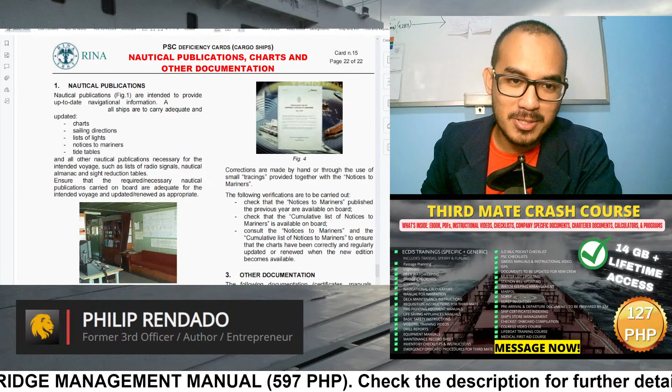For our English speaking viewers, I will do my very best to communicate in English in this live stream. I want to discuss the publications that need to be updated on board.

Plenty of seafarers don't understand this until they go on board. They don't understand that before you conduct your duty, you must be capable of understanding what publications are needed to be checked on board the ship.

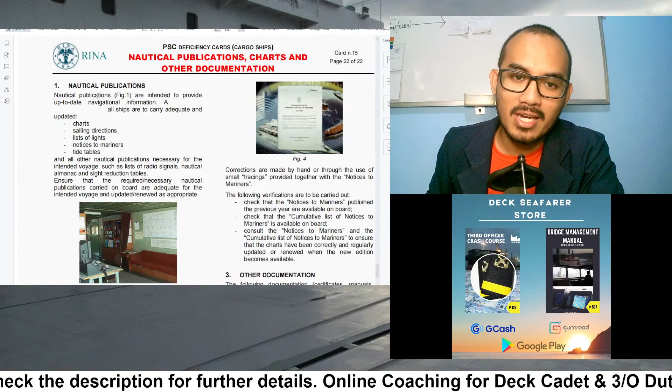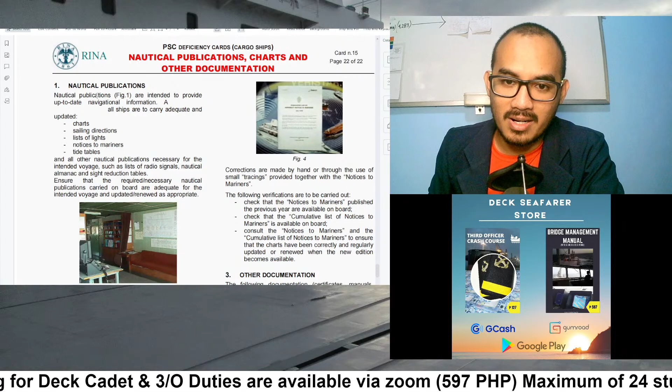If we read the statements right now, this is the file I got from my previous classification on board the ship. RINA is one of the many classifications of ship. In other vessels you'd have ABS, American Bureau of Shipping. In my case it was RINA and ABS. I got a copy of their card, PSC or Port State Control deficiency cards from cargo ships.

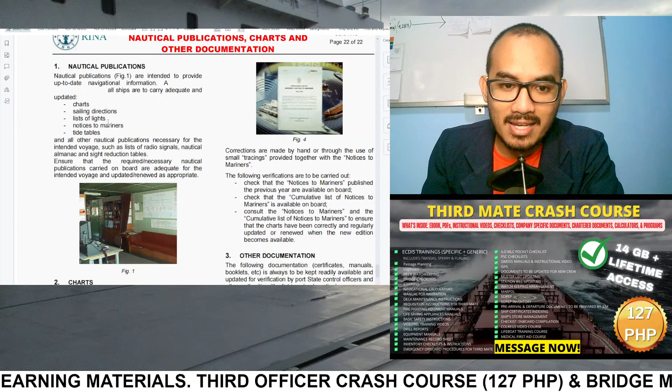Nautical publications, charts, and other documentation. Nautical publications are intended to provide up-to-date navigational information. All ships are to carry adequate and updated charts, sailing directions, list of lights, and notices to mariners.

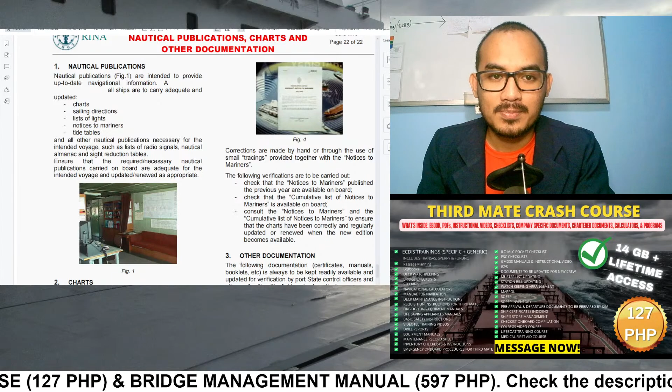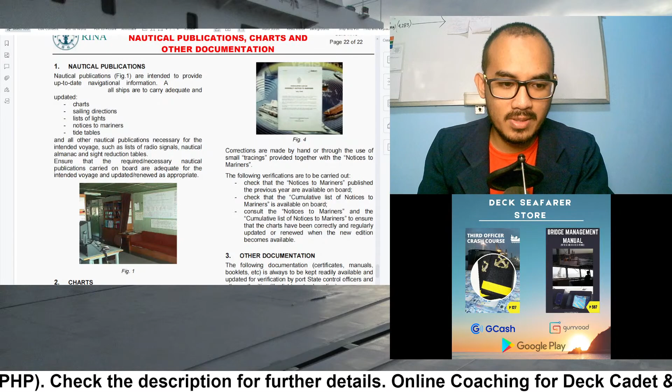Let me just give you a copy of it. Wait, where are the links? Let me change the window capture. Wait, properties, window capture. Admiralty, there we go, okay.

What is Admiralty sailing directions? This is the definition: it provides essential information to support port entry and coastal navigation for all classes of ships at sea, split across 75 volumes, because each one covers a different area. Coverage includes the world's main commercial shipping routes and ports. Each volume offers information on what you see in sailing directions.

Navigational hazards, buoyage, pilotage regulations, local regulations, general notes on countries, port facilities, seasonal currents, ice, and climatic conditions. This information, when used alongside official Admiralty charts, including ENC charts, can help increase situational awareness on the bridge.

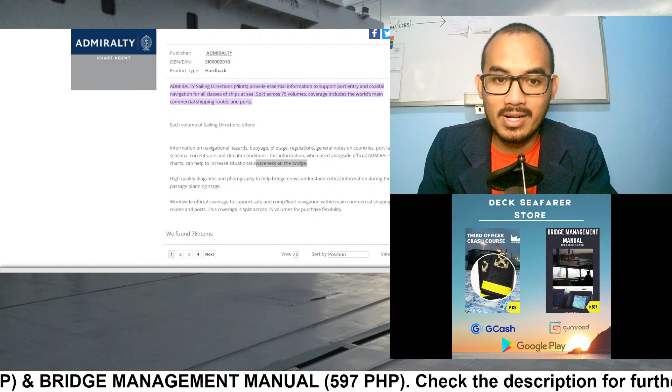Now, plenty of deck cadets, when they graduate from school after finishing their 3 years, don't know what Admiralty sailing directions is. They are not familiar with this publication. They were taught how to plot a course on nautical charts, but not familiar with Admiralty publications. This is quite nerve-wracking for somebody about to be an officer. If you are not familiar with Admiralty digital publications, you won't be capable of updating it long term.

It also says you need to update Admiralty digital list of lights. What is Admiralty digital list of lights? It is an advanced source of navigational lights and fog signal information with coverage of more than 85,000 individual fixed light structures. ADLL also contains a number of lit floating marks, including pontoon lights.

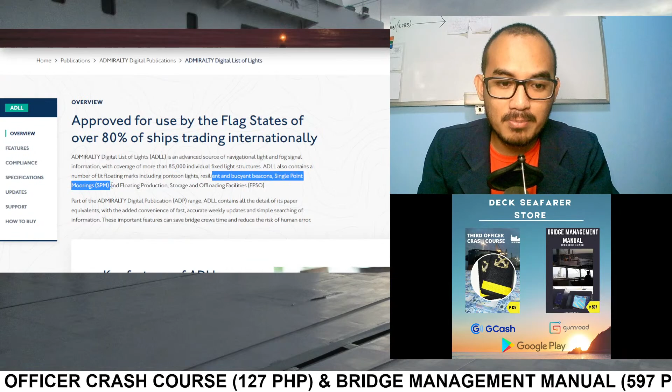If you have studied the IALA Buoyage System Region A and Region B, this is the publication for you: resilient and buoyant beacons, single point moorings, and floating production, storage, and offloading facilities. Part of the Admiralty digital publications range, ADLL contains all the detail of its paper equivalents with the added convenience of fast, accurate weekly updates and simple searching of information. Basically, this is the digitalized version of the paper one.

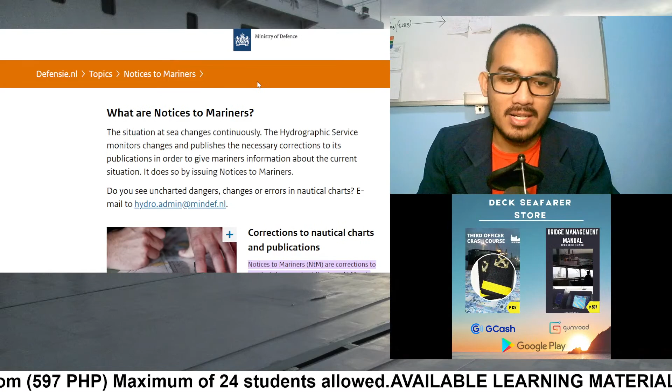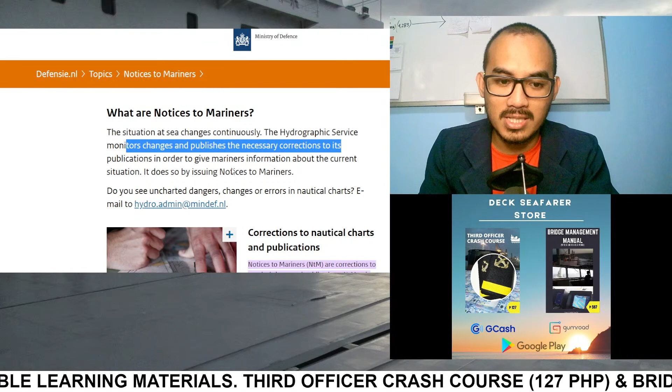Now, what is Admiralty notices to mariners? Quick review: the situation at sea changes continuously. The Hydrographic Service monitors changes and publishes the necessary corrections to its publications in order to give mariners information about the current situation. It does so by issuing notices to mariners.

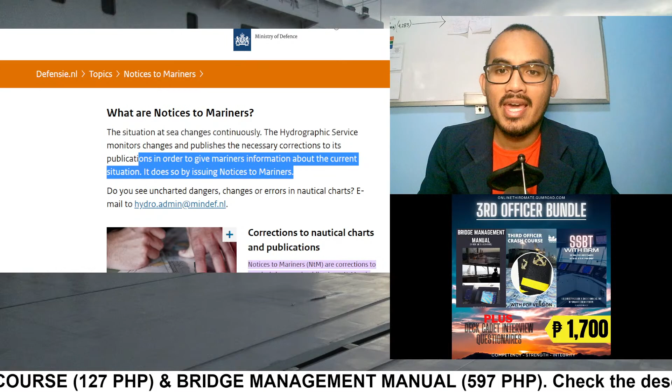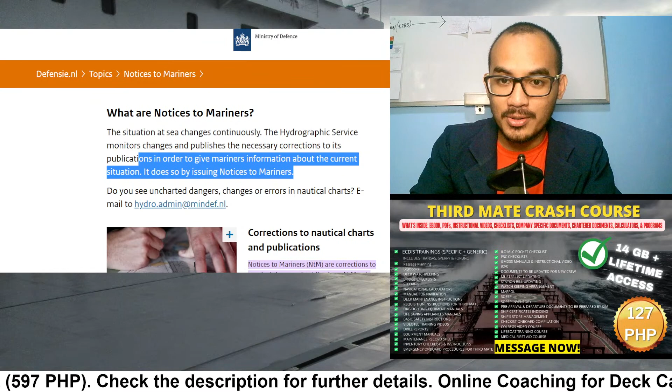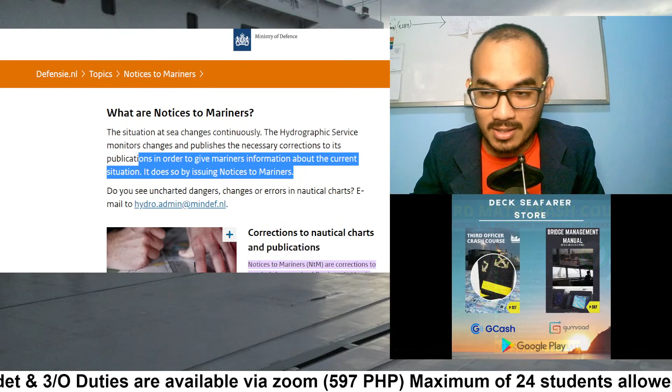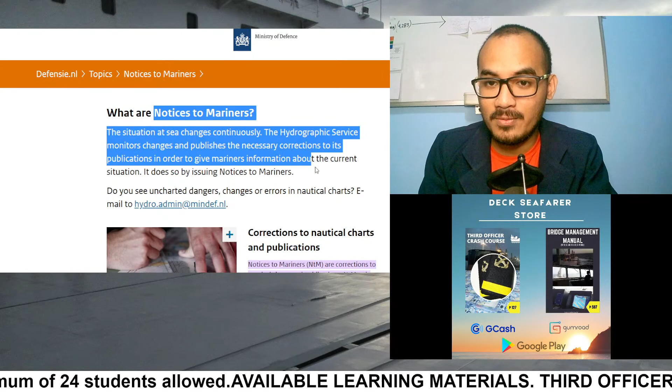For example, in your passage plan you see a clear route. Now all of a sudden you receive data that, in this location, an offshore platform was relocated or built. So you see that in your notices to mariners, and you could update your chart - there will be a course alteration, a change of waypoint. You would inform the company, you would inform your charterer because you received a notice to mariners. In some cases you'll have to plot it in your nautical chart or in ENC, electronic navigational charts.

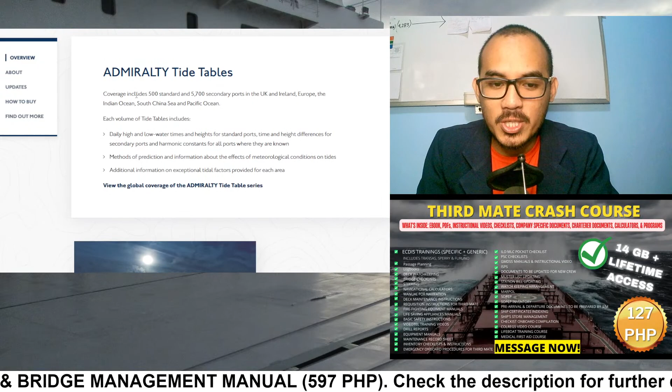Last but not least is: what is Admiralty tide tables? Well, it's very simple. Admiralty tide tables coverage includes 500 standard and 5,700 secondary ports in the UK.

Admiralty tide tables are easy to use, containing tidal times and heights, including tidal stream information to support the planning of departure and arrival times. This is very important, especially for chief officers.

Way back in the day, I used to compute cargo handling, the loading and distribution plan with my chief officer. We always took note of the tides - are we in low tide or high tide? How do we handle the mid drafts? How do we compute for low tide and high tide? I will discuss this further in upcoming videos with regards to trim and stability.

Admiralty tide tables contain easy to use tidal times and heights, including tidal stream information. If you're going to be a duty officer, duty rating, or duty cadet at the gangway, we always put a copy of the Admiralty tide tables at that specific date, at that specific day, in our gangway.

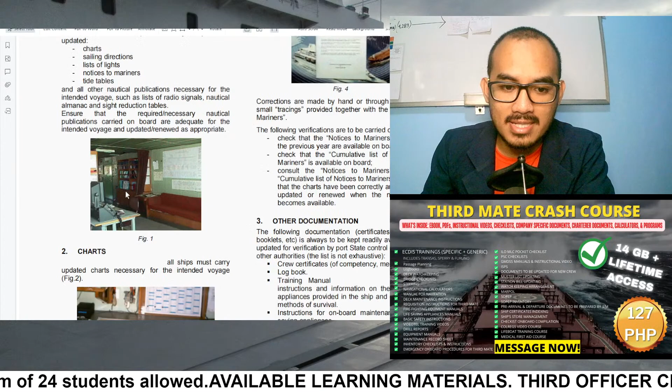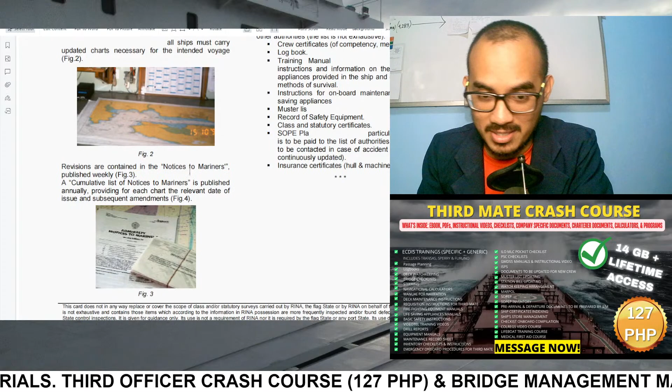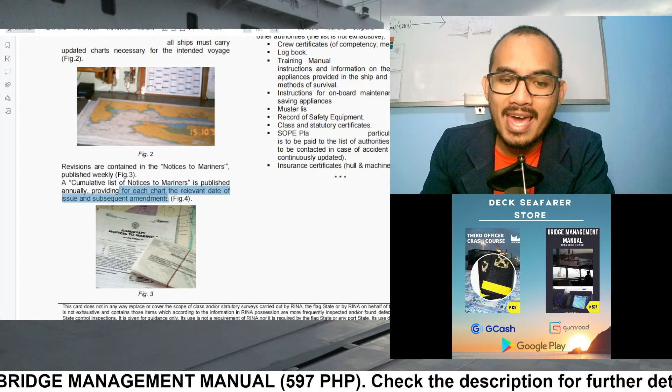Next, you also have to update the charts. All ships must carry updated charts necessary for the intended voyage. Revisions are contained in the Notices to Mariners, the one I mentioned earlier, published weekly. A cumulative list of notices to mariners is published annually, providing for each chart the relevant date of issue and subsequent amendments. You could also receive daily notices to mariners if applicable to your situation.

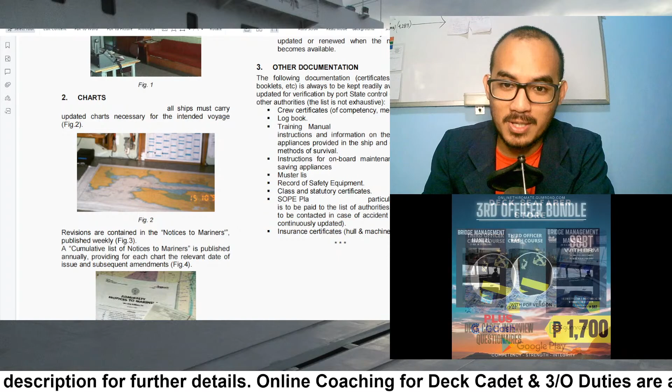There are plenty of notices to mariners that you might receive, but not every NTM is applicable to your location, your ship, or your condition. Just take note of that. But if it is applicable, you must update everything inside the bridge.

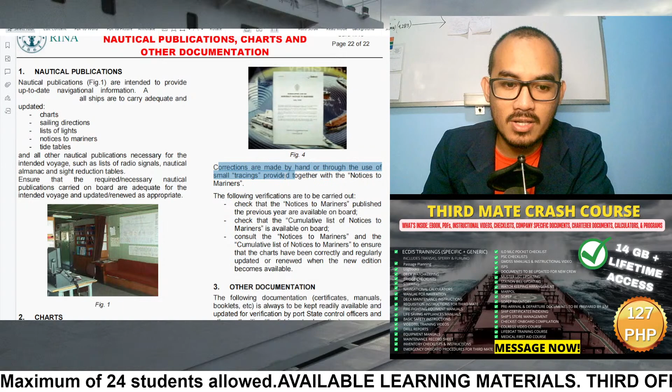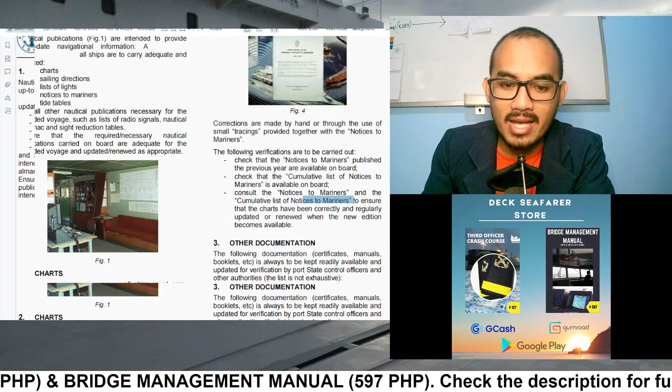Corrections are made by hand or through the use of small tracings, provided together with the notices to mariners. The following verifications are to be carried out: check that the NTMs published the previous year are available on board, check that the cumulative list of notices to mariners is available on board, and consult the NTMs and the cumulative list to ensure that the charts have been correctly and regularly updated or renewed when the new edition becomes available.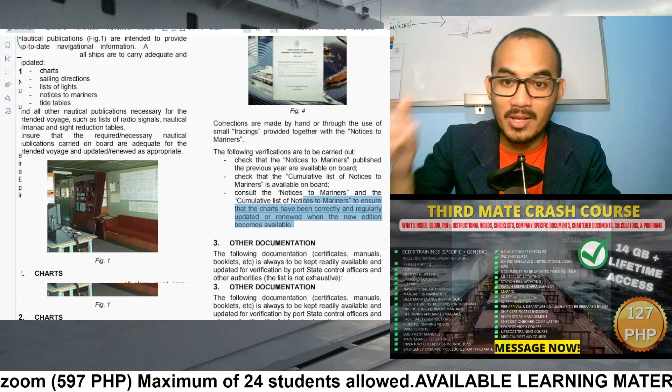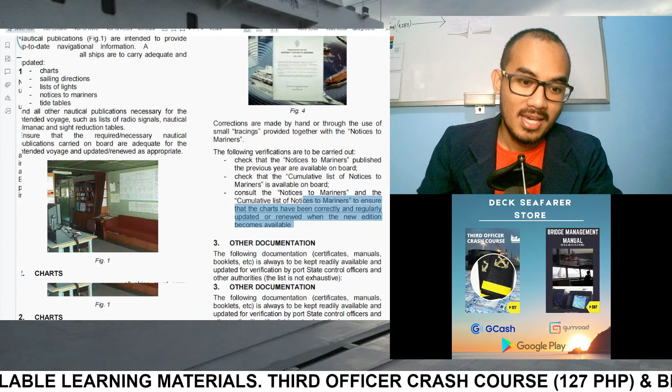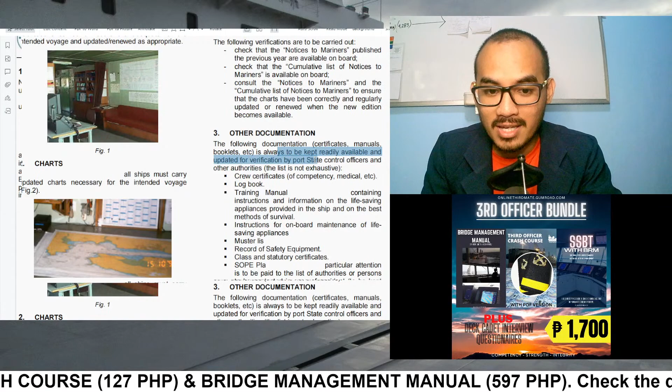Next, other documentation. The following documentation, certificates, manuals, and booklets are always to be kept readily available and updated for verification by port state control officers and other authorities. The list is not exhaustive.

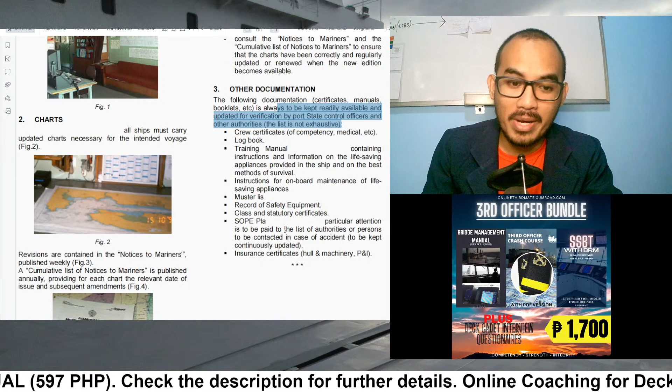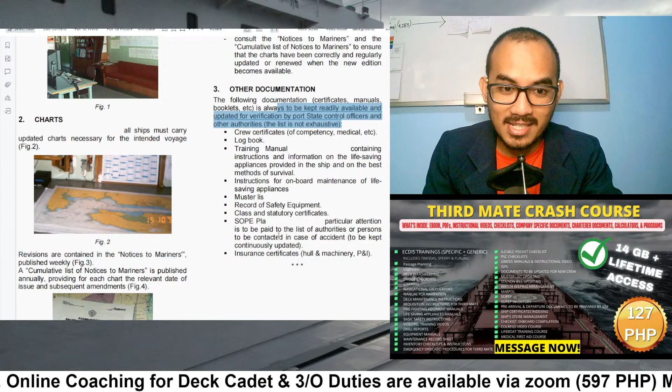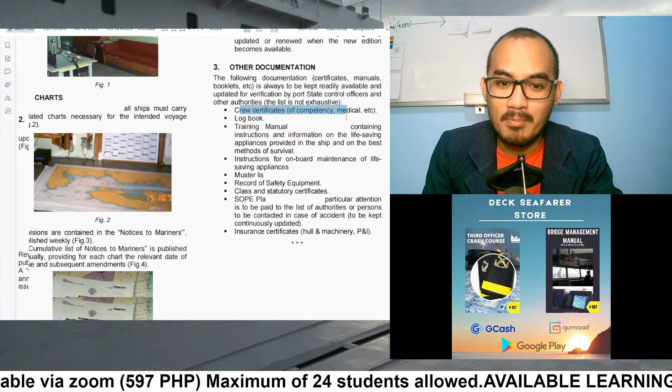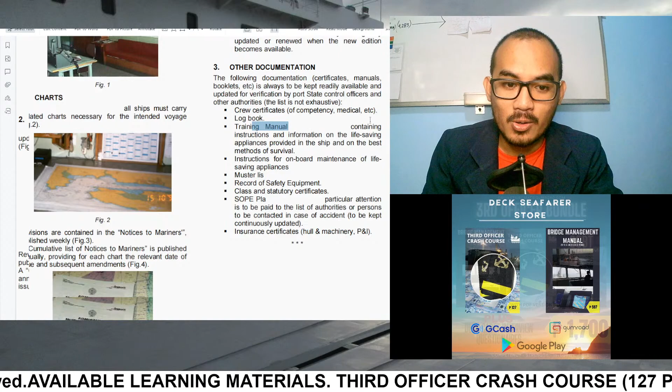Hindi lang nalagay dito sa Port State Control Deficiency Card, pero pwede itong madagdagan. Ano ba yung mga dapat updated sa barko? Yung mga crew certificates, yung competency nila, yung medical, etc. Pati yung passport, minsan check din niya, seaman's book, expired na ba? Next is logbook. Next is training manual containing yung instructions and information on the life-saving appliances.

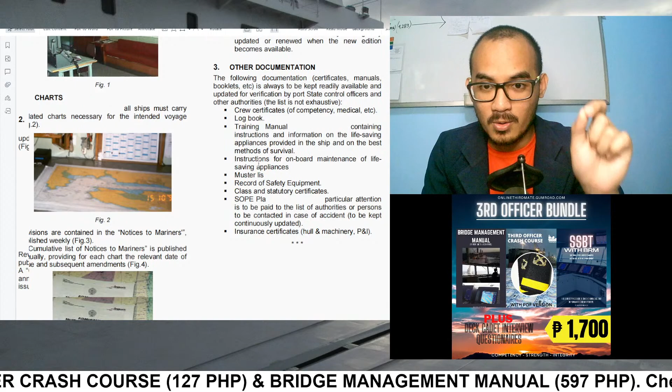Sa'yo ito as a tresero opisyal, provided in the ship and on the best methods of survival. Updated siya, may mga pirma ng crew, may lista ng crew. Instructions for onboard maintenance of life-saving appliances. Magkadikit yan dito sa training manual usually.

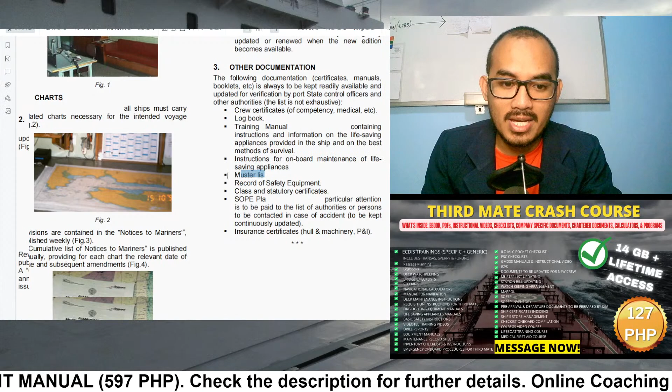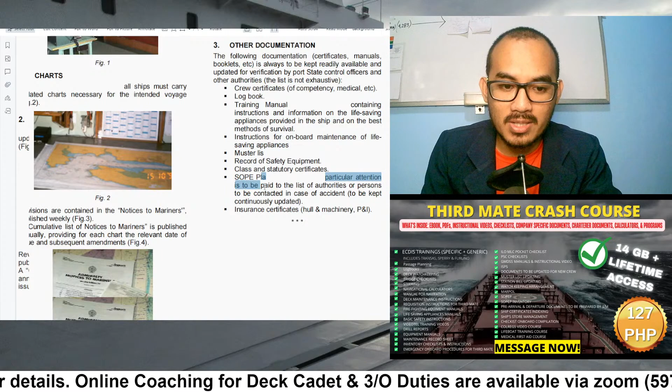Muster list, okay? Record of safety equipment, meron din. Class and statutory certificates, okay? Kasama mo dito si Kapitan. SOPEP plans, particular attention is to be paid to the list of authorities or persons to be contacted in case of accident, to be kept continuously updated.

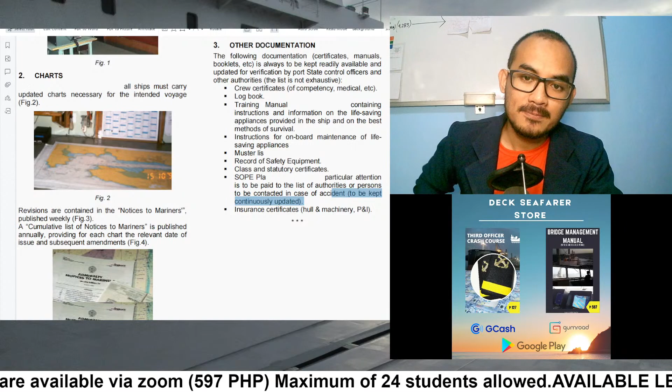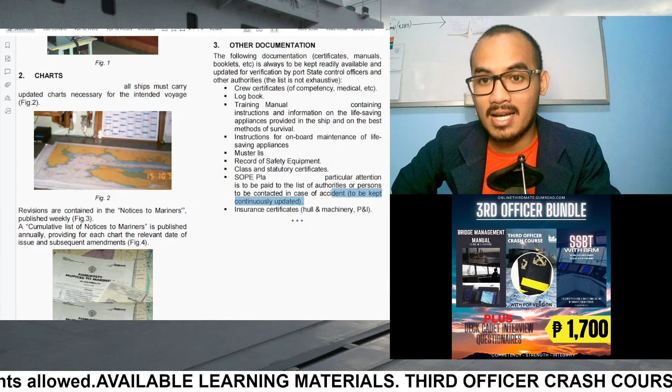I have made a video about this with regards sa pag-update ng emergency contact list. Hanapin niyo po yan sa akin channel, meron po akong video. If I remember, G-001 ba yun? Yung content, depende po yun sa inyong company. Yun yung kanyang certificate, yun yung form number. Depende po yan sa amin noon, if I remember, G-001 eh. Pero tignan ko ulit mamaya.

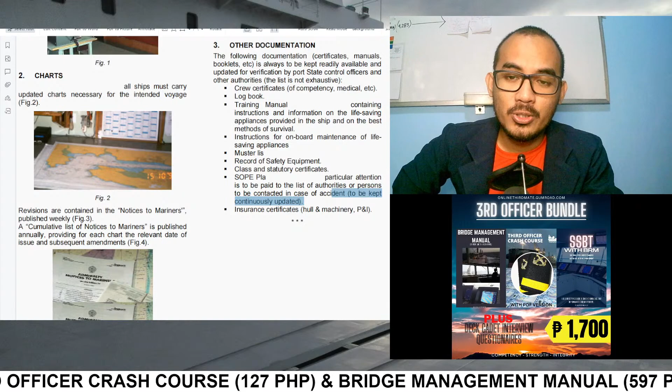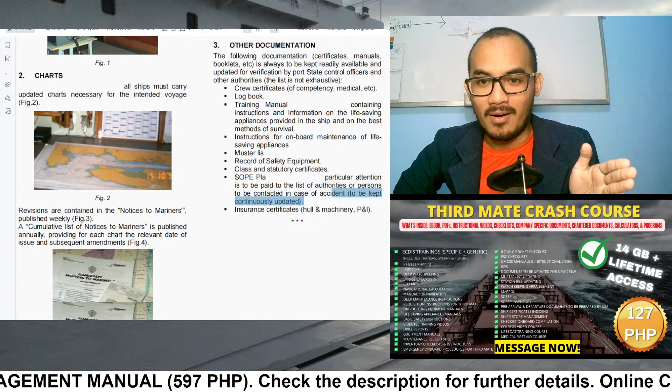Yung emergency contact sheet na yon, ina-update po yon kada palit ng puerto. Kung napunta ka sa Africa, tapos next port mo Africa pa rin, same pa rin yung mga contact details halos doon. Pero pag nanggaling ka sa Africa, napunta ka sa India, papalitan mo doon yung emergency contact sheet mo.

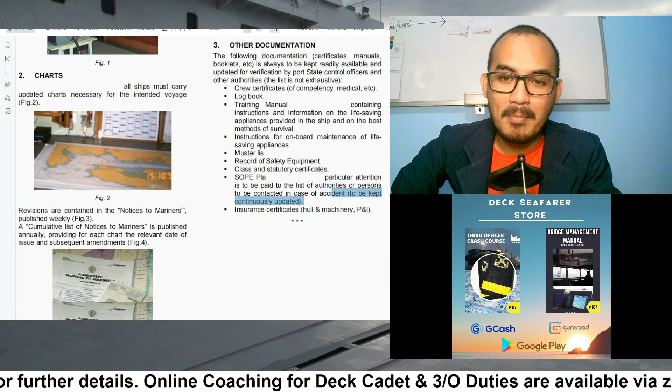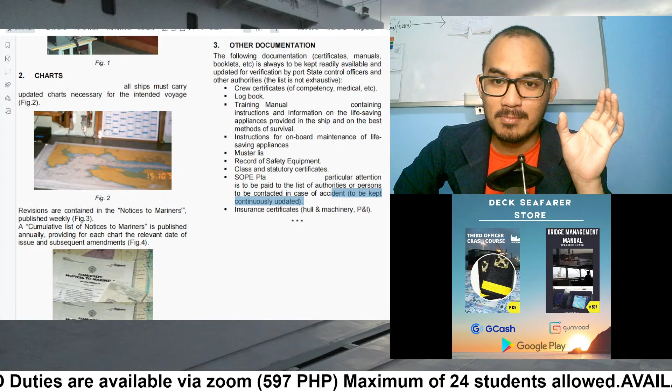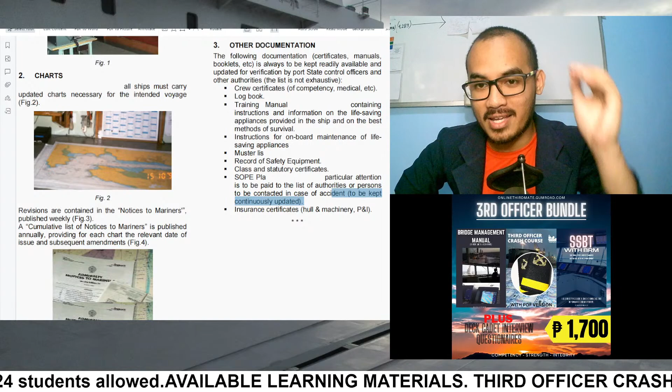Same po para sa P&I correspondence, same po para sa company security, sa CSO o sa ship designated person ashore, yung DPA. Same pa rin yung details, pero iba po yung sa local emergency contact. Kasi nga napunta ka from Africa to India, so babagoy mo yun, kita ko yun.

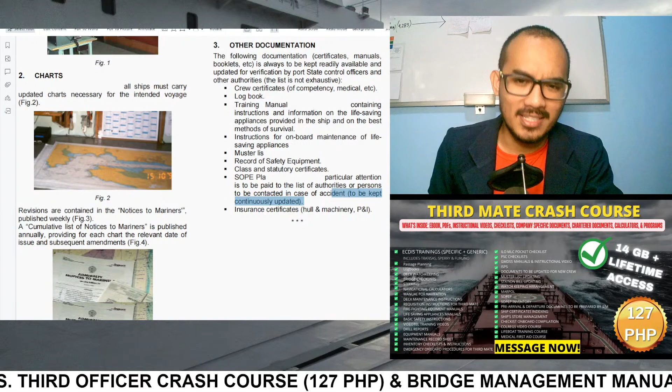Panoorin nyo na lang po yung aking video, ang title is pag-update ng emergency contact sheet. It's somewhere here sa akin channel, mga earlier videos ko yan.

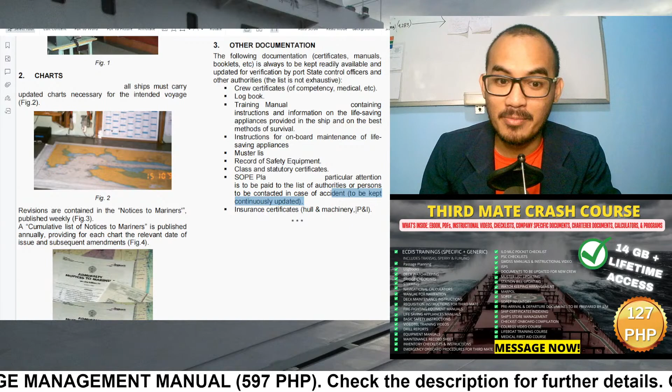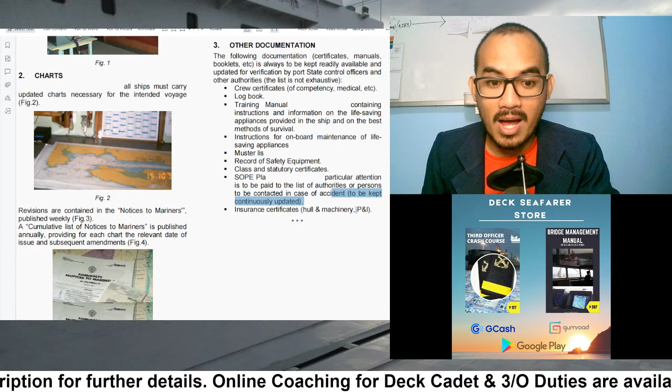Tapos insurance certificate, kasama mo dito si Tano, si Kapitan. Hull and Machinery, P&I, kasama mo yan siya dyan. Kailangan updated po yan at active, most importantly active yung mga numbers. Kasi may mga rare instances po na ang port state control, tinatawagan yung mga numbers ng P&I, yung P&I means protection and indemnity. O yan, kumbaga sa insurance mo na yan, sa barko, in case na may mangyaring hindi maganda.

But then again, simple lamang itong video na ito. Just make sure lang na ito, yung mga nautical publications, charts, and other documentations are all updated. Yun lang naman po ang basic na idea na ito, hindi naman siya ganun ka-complicated.

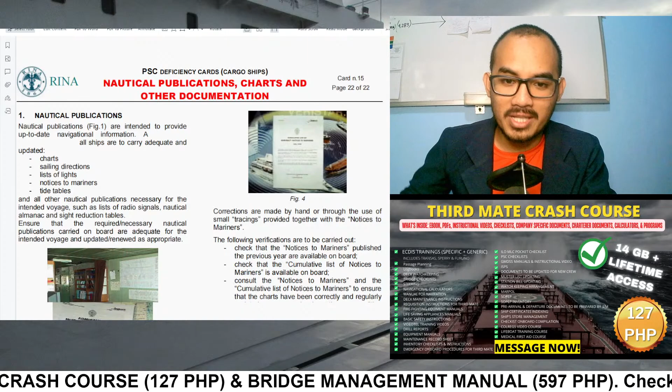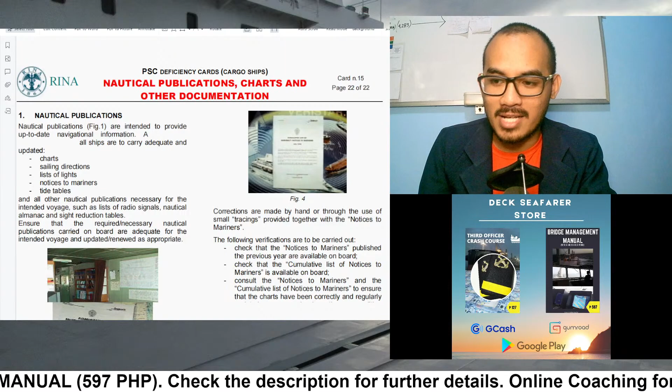Kasi minsan po nalulungkot ako kapag may mga seafarer tayo, yung mga newly seafarers din, yung mga cadets, nakakatapos lang sa school pero hindi sila familiar sa ano yung Admiralty Sailing Directions, paano mag-update ng ENC, paano mag-update ng nautical charts, anong gagamitin mo, magti-tracing paper ka ba dito, anong gagamitin mo dito, sign pen ba, ball pen ba, o nagkamali ka dito ng sulat, anong ilalagay mo? Lalagyan mo ba ng correction fluid?

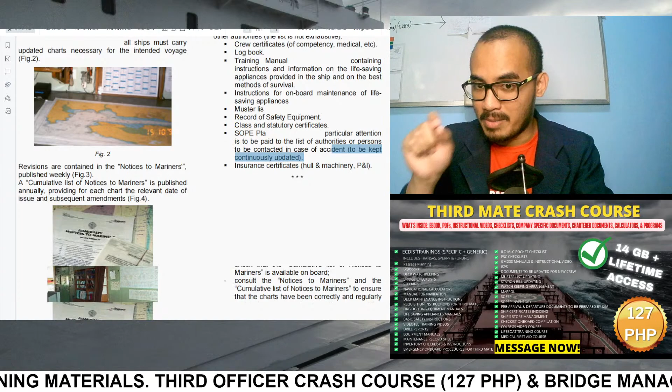By the way po, pag magko-correct po tayo ng mga nautical charts, paalala ko lang din po sa inyo, baka po makalimutan ninyo. Pag mag-update ng nautical charts, hindi po tayo gagamit ng liquid eraser o yung white na fluid, hindi po ganon, hindi pwede yon. Pag may mali ka na entry sa deck logbook mo or sa any logbooks or sa nautical chart, lagyan mo lang ng linya. May mali kang naguhit o may pangalan, isang guhit lang na ganyan tapos pirma. Hindi po pwedeng lalagyan mo ng correction fluid yon, number 1, it's against company policy rin yon.